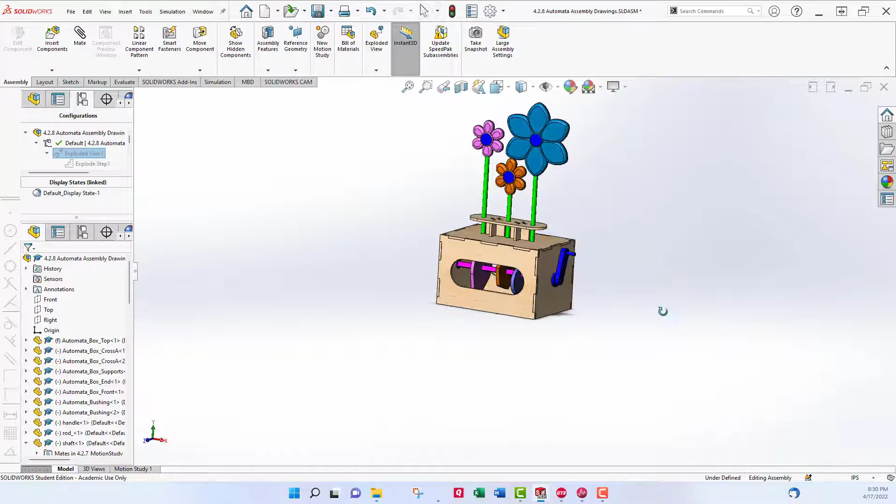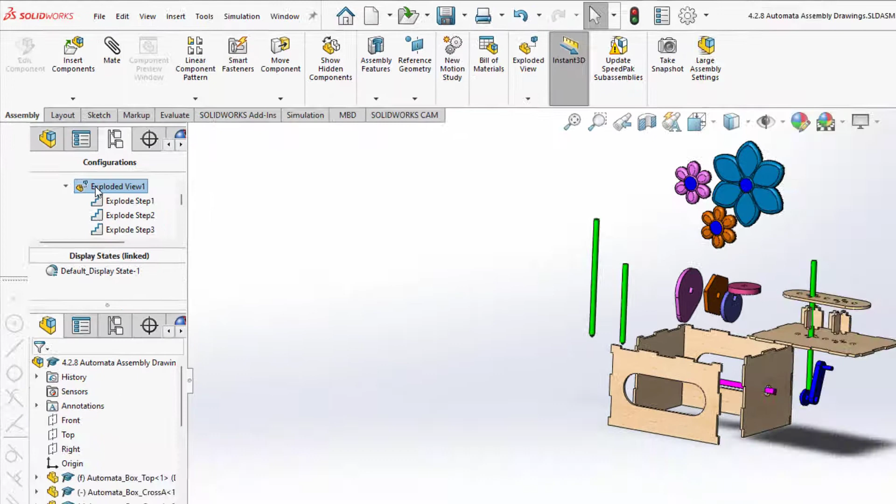If you want to check whether your exploded configuration works, you can go back into this and toggle it back and forth between an exploded view or not. All you've got to do is look right where my cursor is flashing, where it says Exploded View 1. I double click on that, and I can see it pop open and closed. That was the explosion I left you with in the last video.

So now what we're going to do is make a drawing out of this, a drawing from the assembly. The way to do that is to come up here and select File, Make Drawing from Assembly.

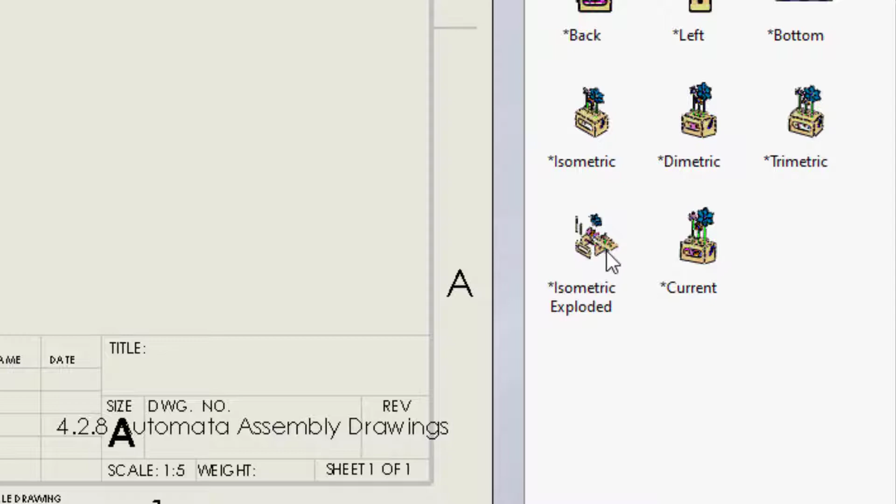This should open up the default Westwood template, and now you'll see down here in the lower right hand corner this isometric exploded option, which is only available if you've got an exploded configuration within your assembly. So we do have that, and all I've got to do to bring this into my drawing file is click, hold, and drag it into my model.

Now that's pretty small and not very colorful, so the first thing I want to do is change the way that it looks. I'll do that by scrolling down here, and I can make it so that it's shaded with edges rather than just lines.

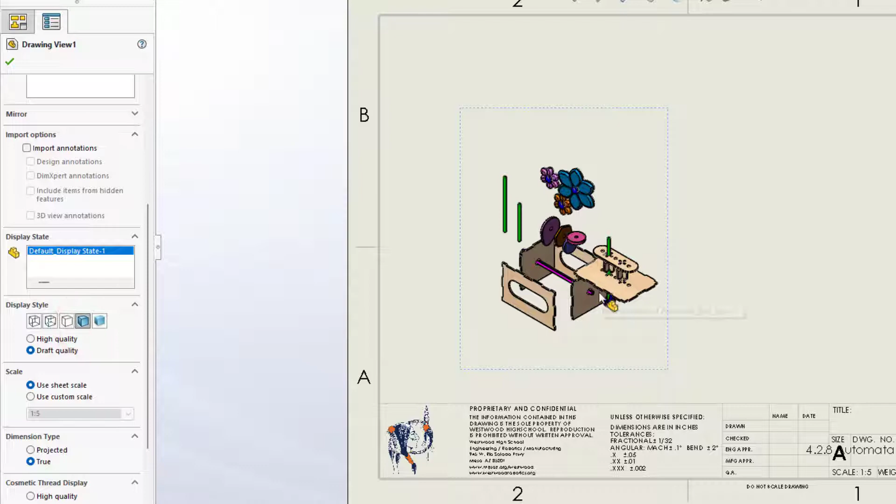If you want a high quality preview, I can take a look and make it a high quality preview. I can zoom in, see all my parts, and it's a pretty good exploded view. Not necessarily perfect, but not bad.

If I want to change my scale, I can certainly do that. I'll click Custom Scale. 1 to 2 is a little too big, so I'm going to stick with 1 to 5. Looks pretty good to me.

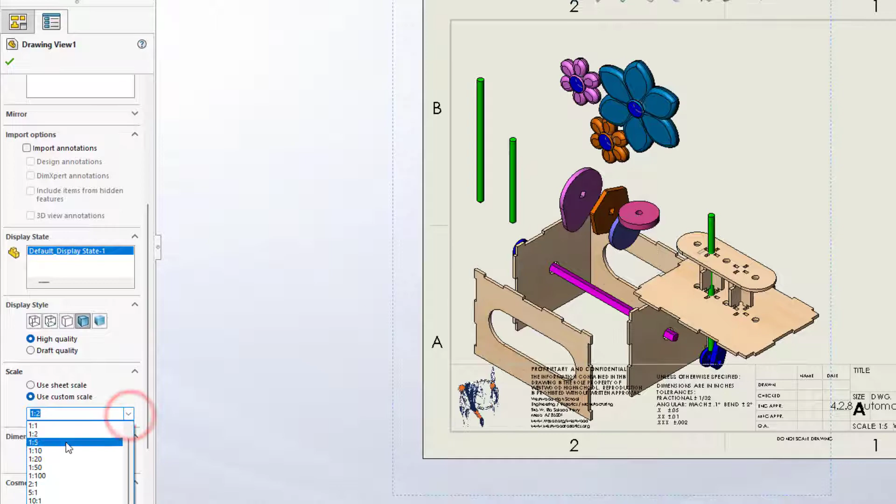So now I've got my exploded assembly view in this drawing sheet. The next thing I want to do is add a bill of materials.

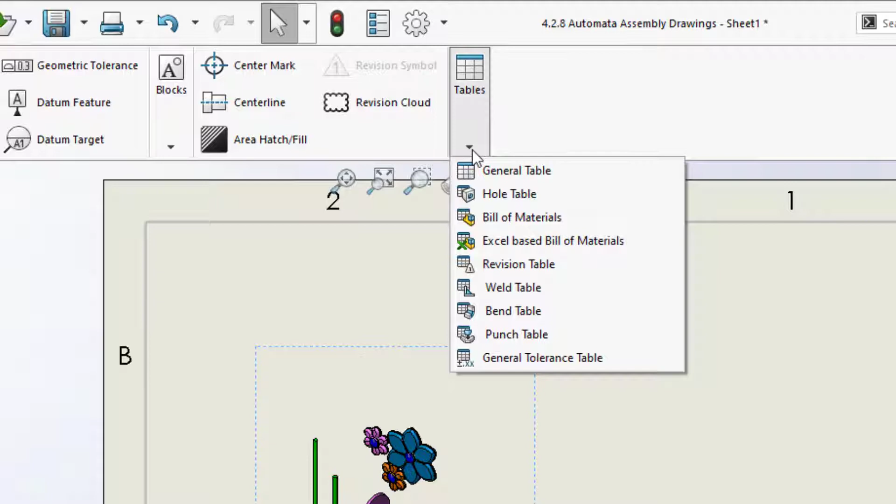The way I add a bill of materials is, with my exploded view selected, I come up here to Tables and click the drop down, and what I want is a bill of materials. You can accept the standard bill of materials right up here in the upper left corner, and we're going to go parts only on it. Click the check mark, and now you'll see a table drag in here.

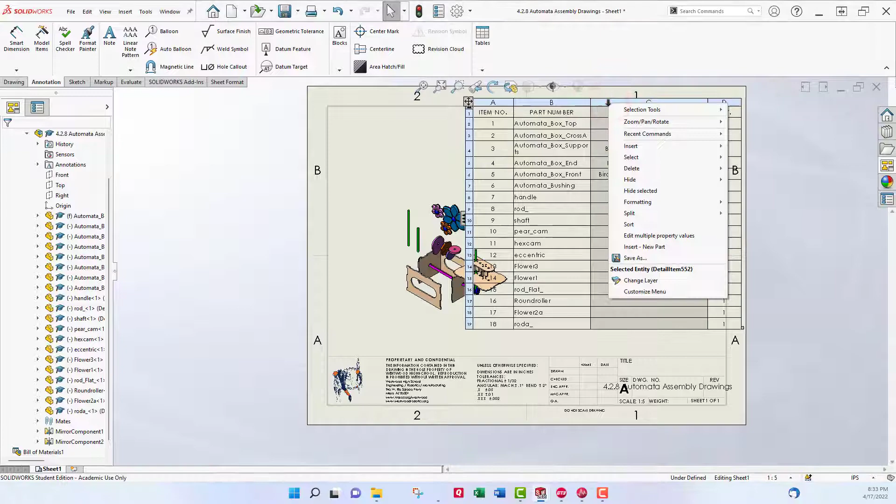Now you'll see that it's got a description column. I'm going to ask you to delete that for this assignment, since we don't really need it. All I do to delete that description column is click on it, right click, and go ahead and delete that column, making sure I'm deleting the column and not the table.

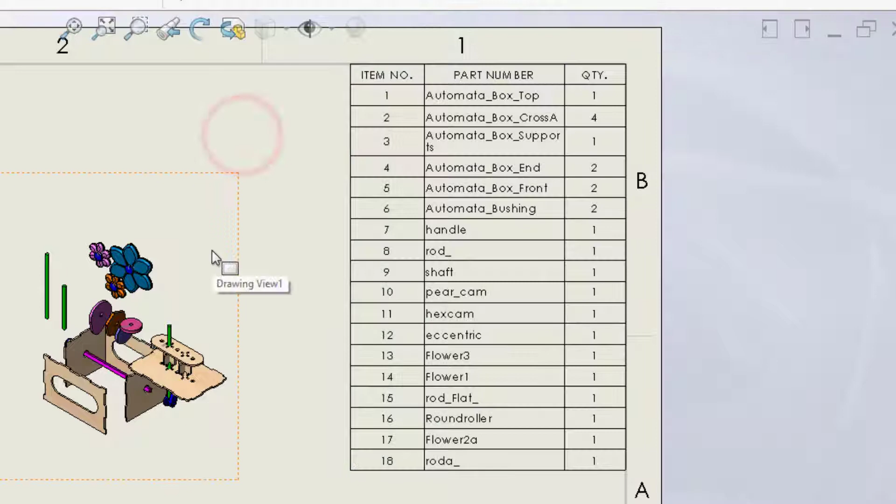Drag your table so that it grounds in the upper right hand corner. Now you'll see my particular assembly has got 18 parts in it. I can manipulate this around a little bit, and each one of these item numbers is a part.

I can play with the margins in my table to make it a little more presentable, and when I do that I may have to reground it to the corner of my drawing sheet like I just did. So these are basically the file names of everything that's in my automata.

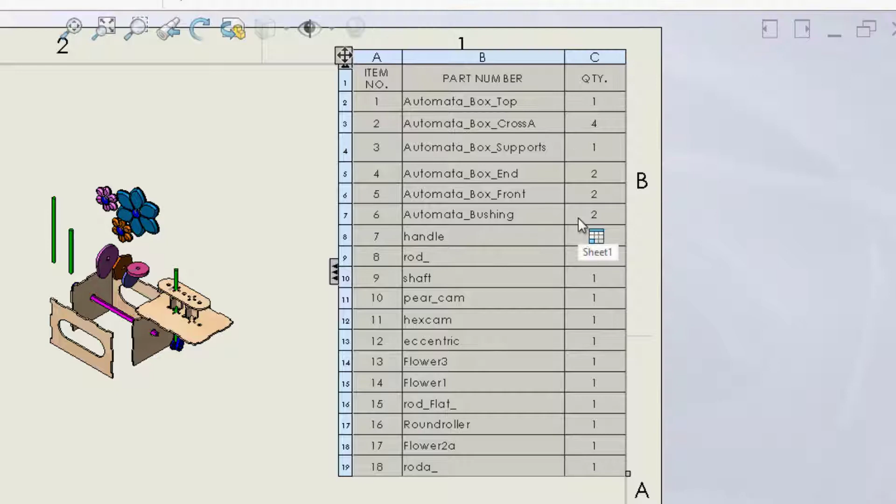You'll also notice it doesn't repeat. If I've got two of something, it shows up as 2 in the bill of materials, like the automata bushing. Well, this is useful, but it's not very useful because I don't know what the automata bushing actually is.

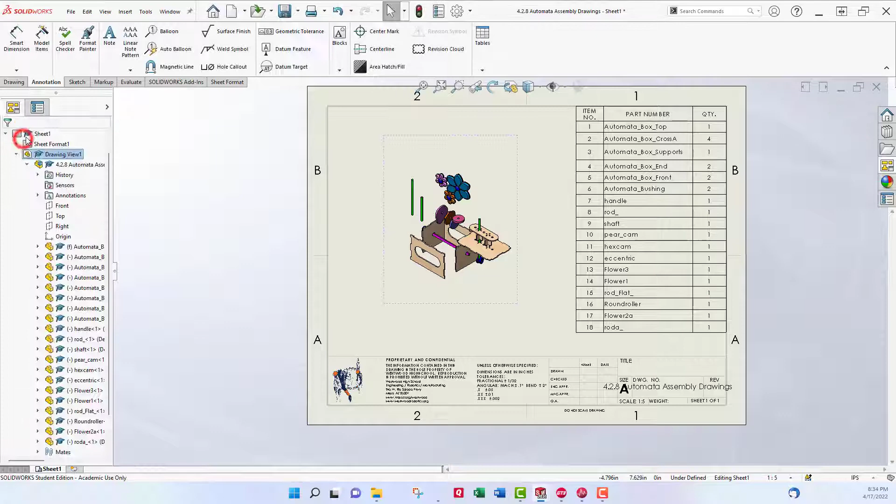But what I can do here is start to add balloons. I can manually click the balloon icon and come around and click on individual elements. Now when you have a drawing with a lot of objects in it, you're probably better off to click Auto Balloon. What Auto Balloon does is select each unique item, one instance of it, and drop a balloon on it. Auto Balloon is good for not missing things, but it's not good for placing the balloons.

So I'm going to click the check mark now, and start looking at the best placement of my individual balloons.

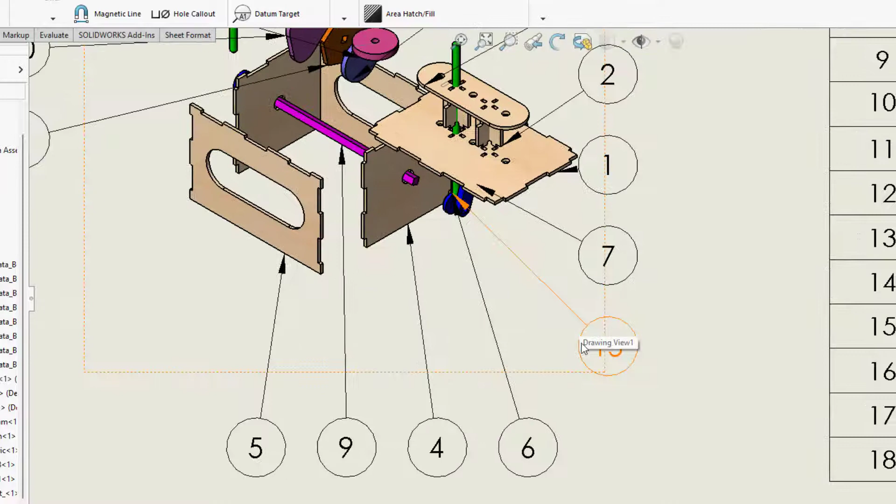So as I come through here and I click at, like, example number 6 is the automata bushing. That's not necessarily a bad placement, nor is item 7, the handle, but the handle's not really pointed to the handle here. So I can drag where that's pointing and make it point a little better. So I can go through here and make some of these corrections, and I can pull things into the best spot or the best view that I think would be.

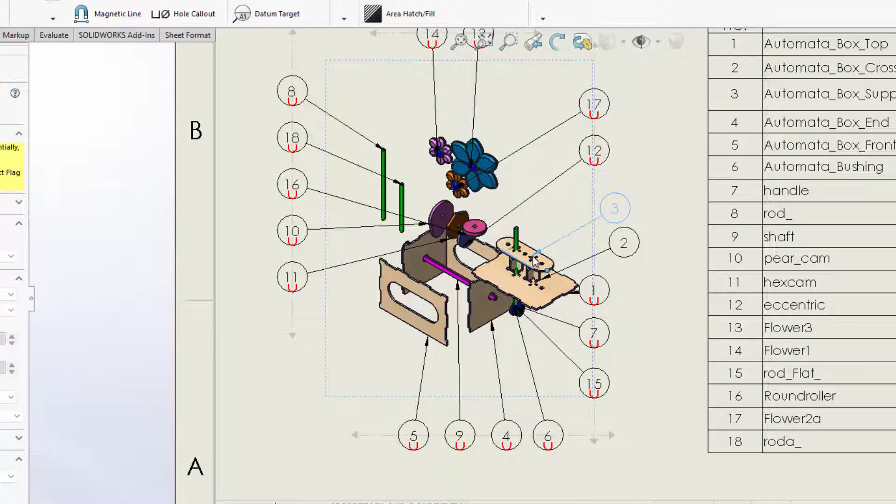So like as an example, number 3 is the box supports. Right there. The flowers don't look too bad. I'm going to pull this number 17 to this side. All of my green posts look pretty good. My cams look pretty good. My rod looks pretty good. My box front sides, though, it all looks pretty good. So I'm going to leave it there. What I'm really looking for is when things are illogically placed or inaccurate.

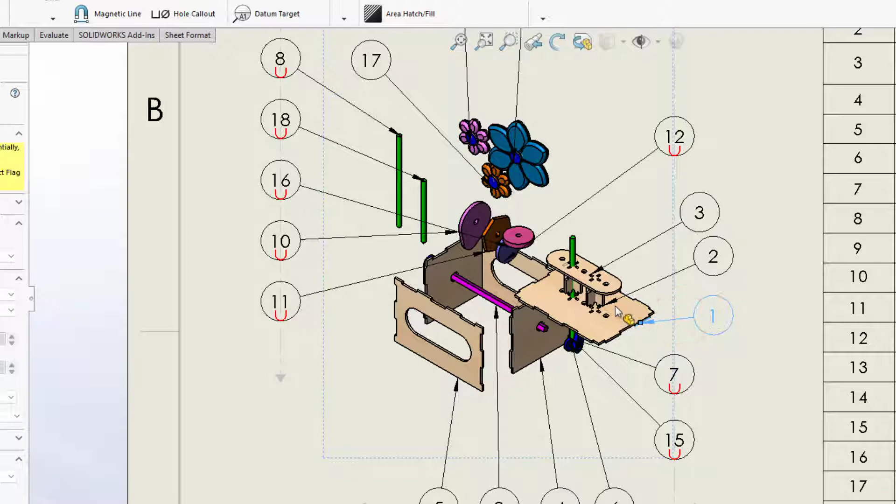But not bad. Now you'll see my exploded view isn't really the best, but I'm going to go with it. So 15, this flat rod, I'm going to actually pull that up. And I'm going to pull this kind of to the top side here to make it show up there. That seems to me like it makes a little more sense.

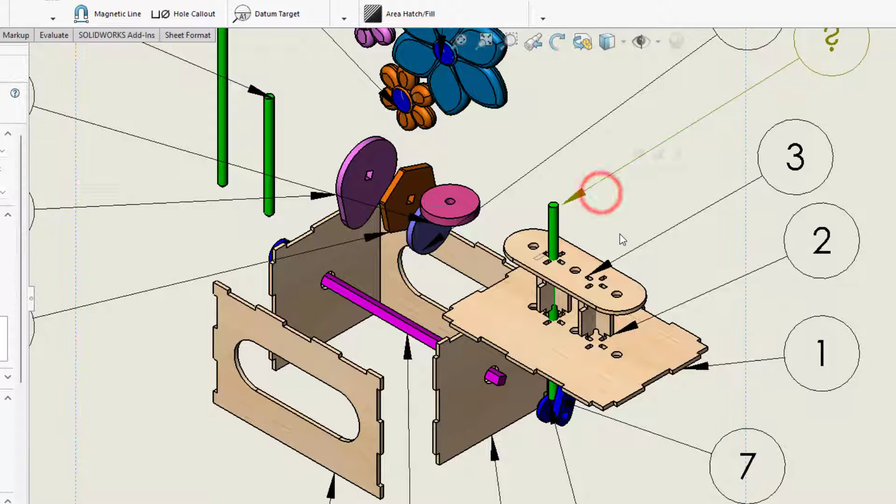And I do have to click on it to make it. You'll see that if I pull my pointer off, I get the question mark here. It just means it doesn't know what it's pointed to. If I come up and touch the object, now it says, hey, that's number 15. So it looks like I've got everything accounted for.

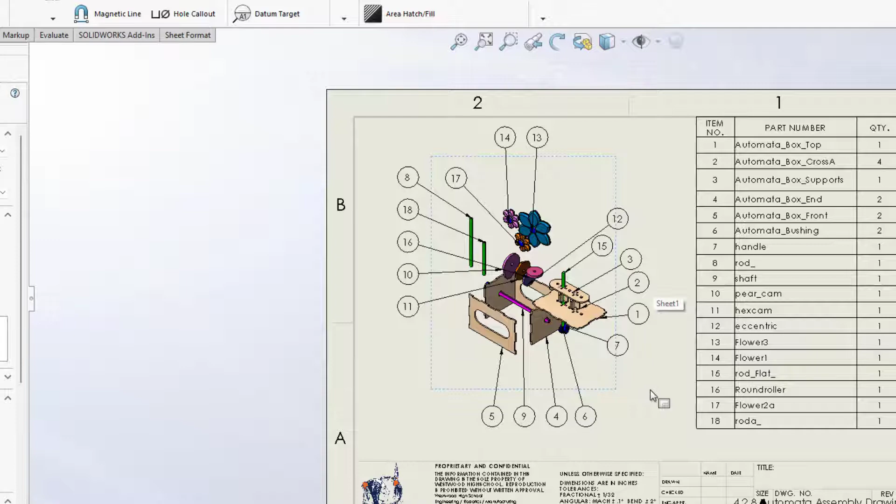So this is not a bad assembly drawing, but this shows its exploded configuration. So almost always what we want to do is add another sheet. And that sheet's going to be in the unexploded configuration. So I'm going to do an isometric unexploded. So to add a second sheet, I come right down here. I click to add a sheet.

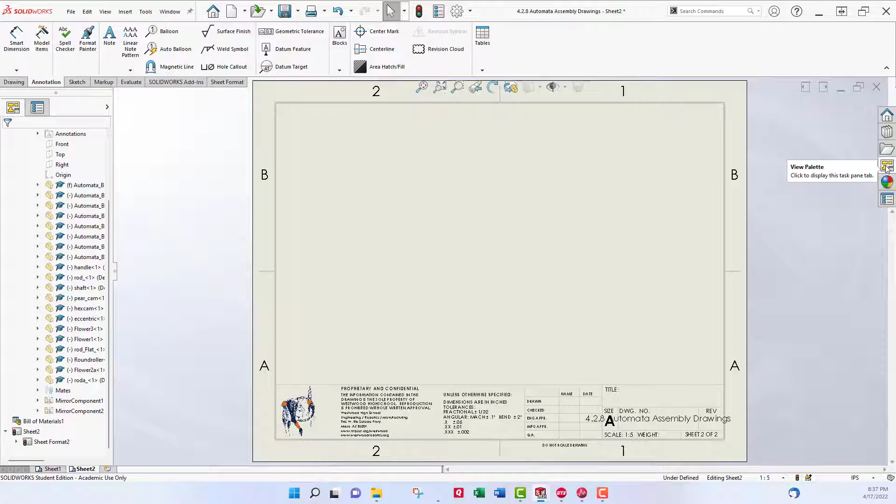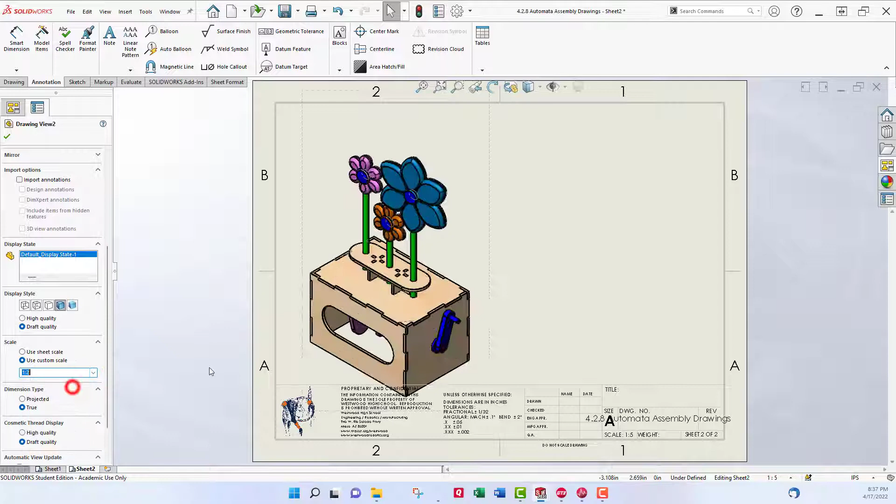And now I'm going to add a drawing view. Come over to my view palette, expand that, and I'm going to pull in this time, instead of the isometric exploded, I'm just going to pull in the isometric view. Again, make it so that it has color with edges. Again, maybe consider altering my scale. On this one, I can probably go to 1 to 2 because it's not exploded. Shift it around. And that looks pretty darn good.

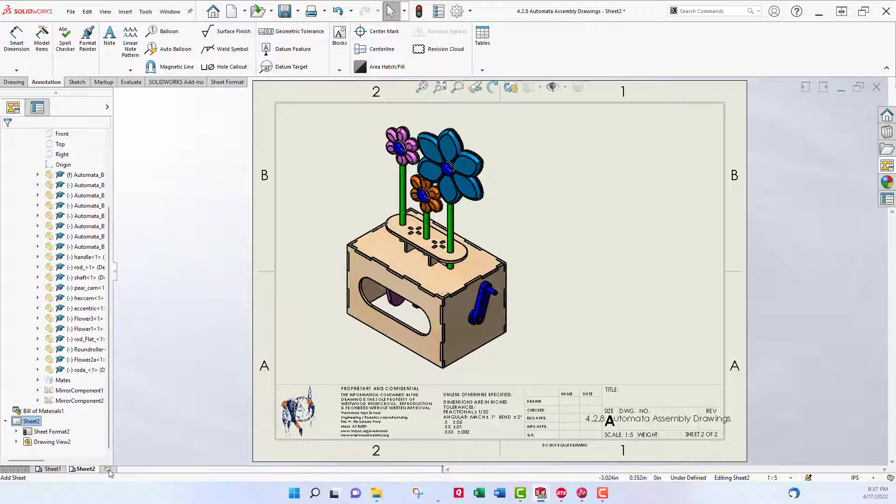Now that shows how the thing looks when it's fully assembled. So these two drawings, this assembly view and exploded assembly view, are what we would use to put our part together. Now we may want to add a third sheet, and I'll ask you to do this. This third sheet is going to show the typical orthographic drawings of front, top, and a right view.

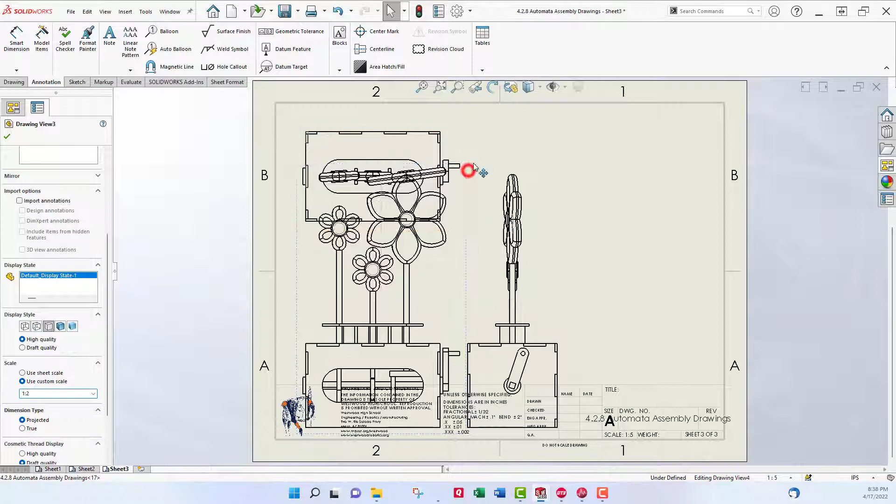Again, I can adjust my scale. If I select the parent drawing, I'm going to use a scale of 1 to 2. Move my drawings apart, and you'll actually see that that 1 to 2 won't work. It's a little bit too big. So I'm going to take 1 to 5 on all of these. And we'll leave it at that.

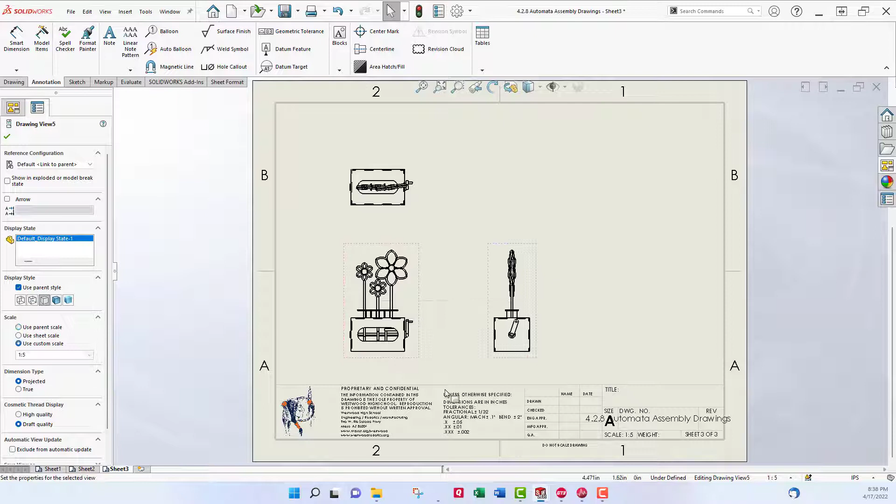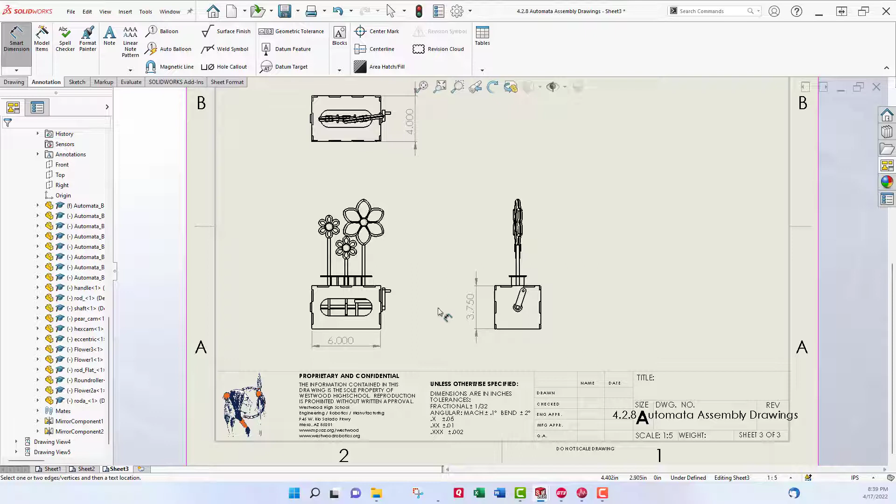Now, occasionally, you will have dimensions that will go with this, and I'm just going to apply some rough dimensions that show the box size. Choose the best view to depict that. And there you have it. That's your finished automata drawing package. That's pretty much what I'm going to ask you to do.

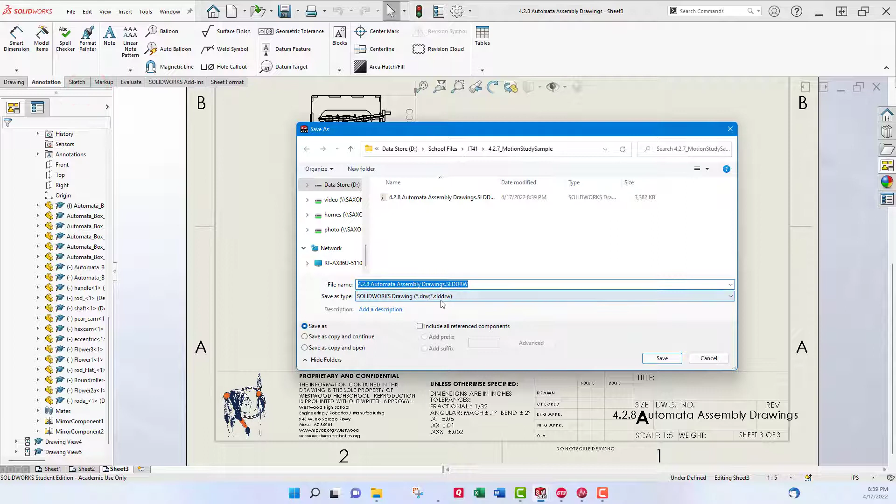What I'd like you to do to save this is go ahead and save it in your project folder as a drawing file. And then I'd like you to go ahead and save it as a PDF. To save as a PDF, I choose the file, but now as the option, I come down here to Adobe PDF and click Save. Save all your sheets. It will print your drawing.